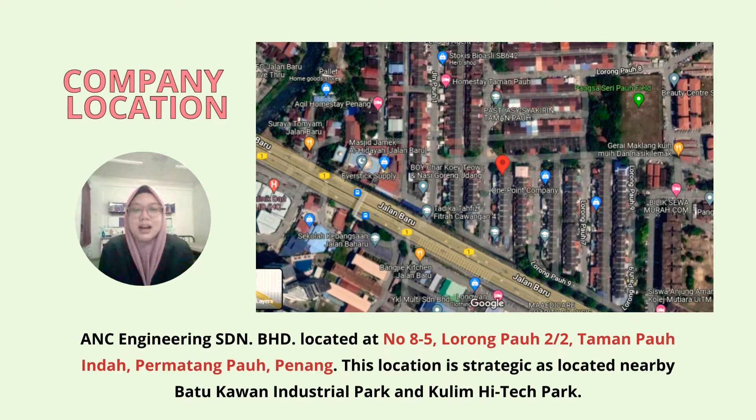The project will be located at lot 9001 till 9016, Mukim 12, Daerah Barat Daya di Persiaran Kelicap, Pulau Pinang. And the existing nearby facilities would be an international school, mosque or church, international airport, health facilities, and also an army base camp. The picture below shows the location of the project.

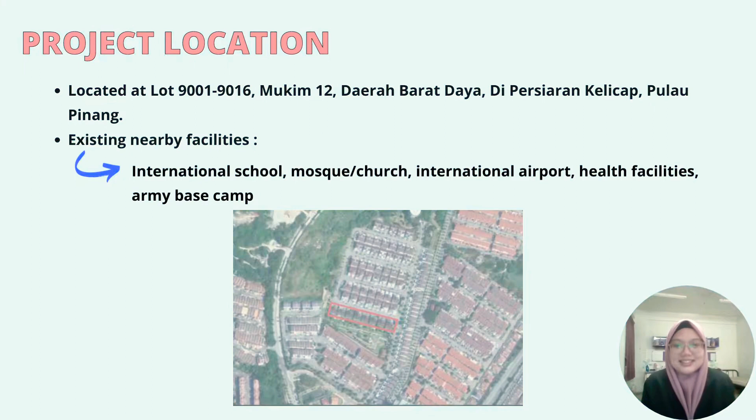So for the project detail, the district will be Barat Daya Pulau Pinang. The local authority will be Majlis Bandaraya Pulau Pinang, MBPP. The site location would be Persiaran Kelicap, Barat Daya Pulau Pinang, and the coordinates will be 5 degrees, 18 minutes 20 seconds north and 100 degrees, 15 minutes 34 seconds east. And the area will be 606,300 square meters.

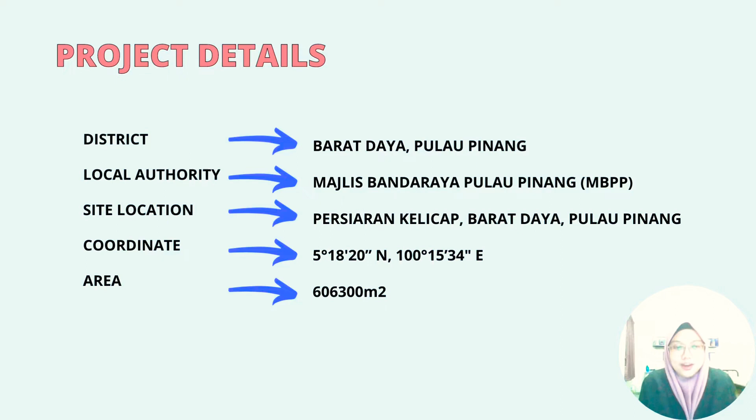Next, I'll be explaining to you the project authorities, the agencies and organizations and their responsibilities. So the Public Works Department, also known as PWD, their responsibility will be to monitor the project operation and the requirements that the developers and the contractor must meet with regard to environmental compliance. The Urban Development Authority would be observing the terms outlined in the letter of authorization. Next is the Road Development Authority. Their responsibility is to observe the terms outlined in the letters of authorization.

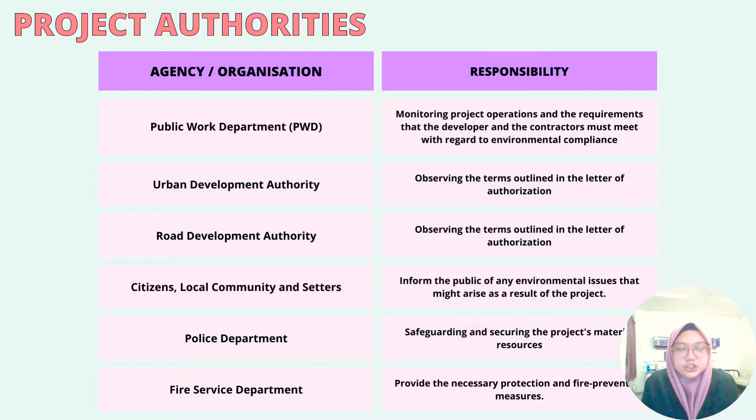Next, the citizens, local community and setters are to inform the public of any environmental issues that might arise as a result of the project. Next is the police department. Their responsibility is to safeguard and secure the project's material resources. And lastly is the fire service department. Their responsibility is to provide the necessary protection and fire prevention measures.

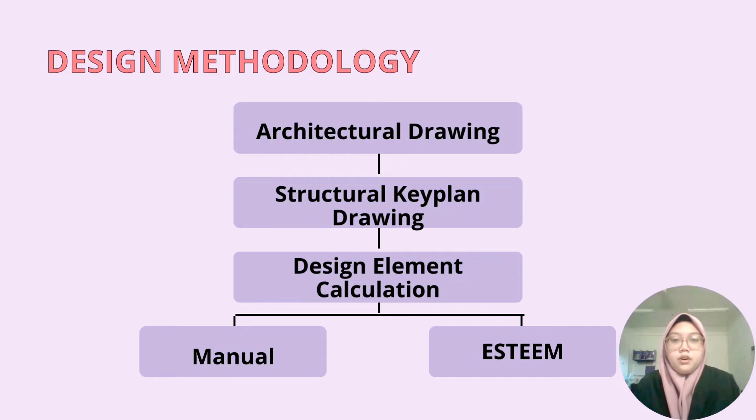My name is Arliana Natasha. I would be the structural engineer for this project. So I am going to explain to you the structural design. For the design methodology, first you need to have the architectural drawing. Next, from the architectural drawing, you need to provide a structural key plan drawing, and then you need to do a design element calculation from manual and Esteem, and both of the calculations are then compared.

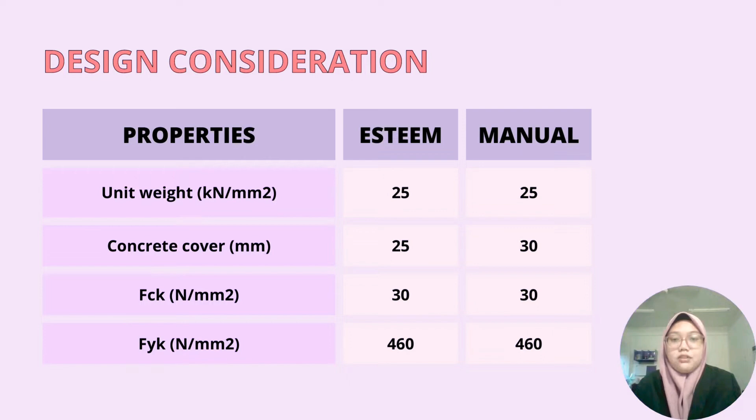The table shows the design considerations for both Esteem and manual. So the unit weight for Esteem would be 25, same goes with the manual, and the concrete cover for Esteem and manual is different. Esteem would be 25 and manual would be 30. The fck for both Esteem and manual is the same, which is the value 30, and the fyk value is 460 for both Esteem and manual.

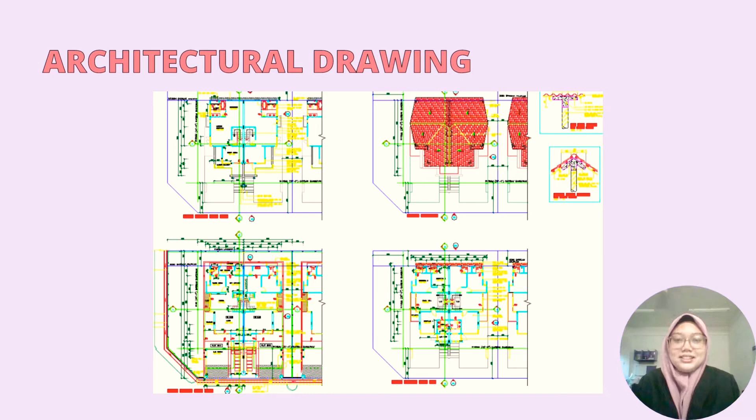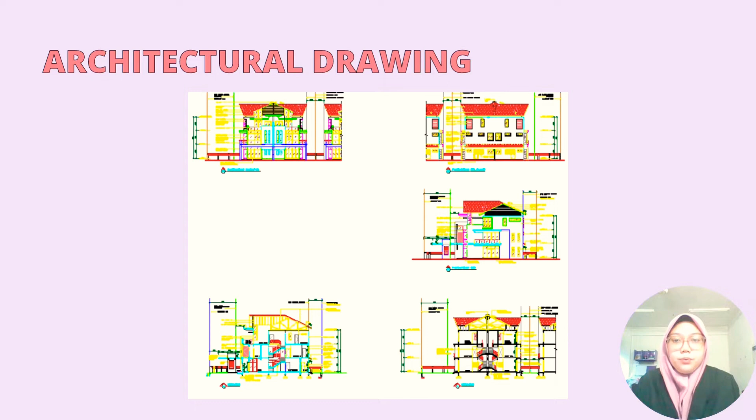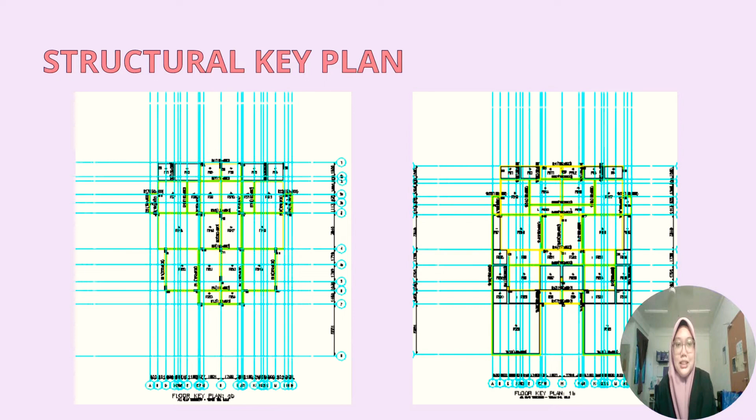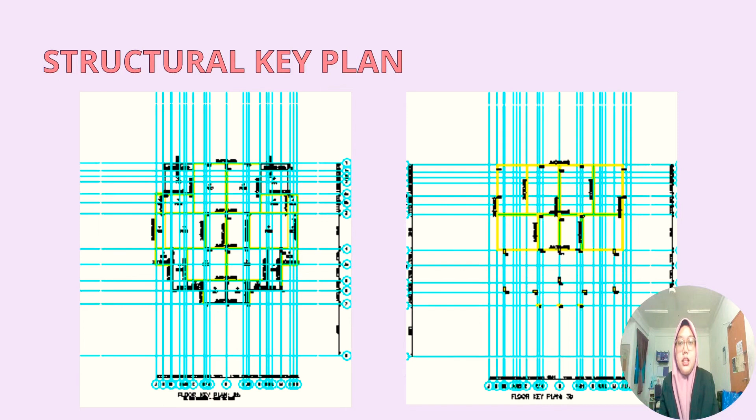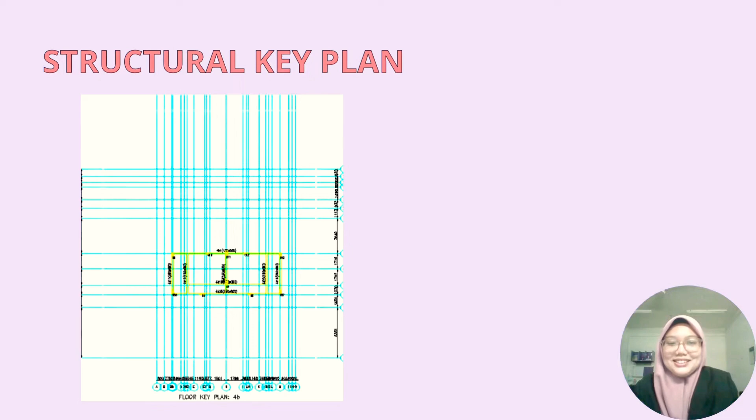The load transfer flow is first from the ground slab to the beam, then the load to the column, then lastly to the foundation. This is also from the highest floor till the ground floor.

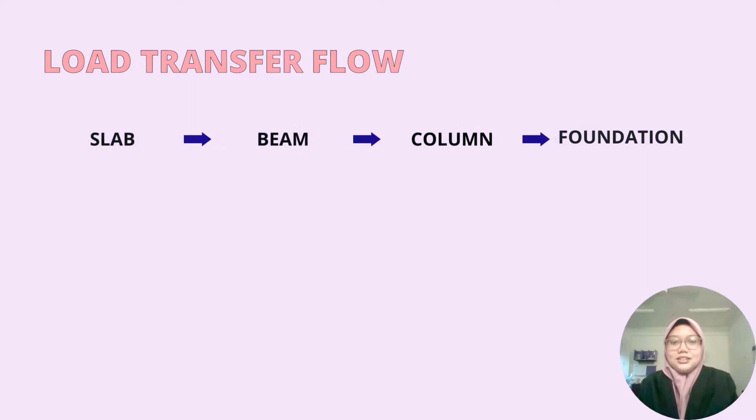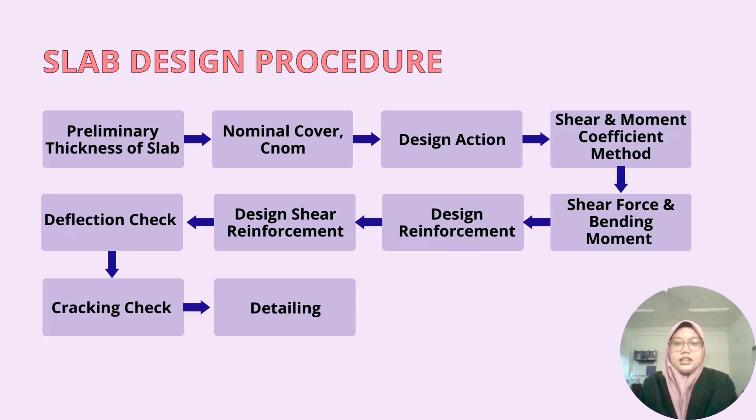So for the slab design procedure, it is shown on this flow chart. So first you need to have the preliminary thickness of slab. Second, the nominal cover, C nom. Then you need to find the design action. Fourth is shear and moment coefficient method. Fifth is shear force and bending moment. Sixth, you have to design the reinforcement. Seven, design shear reinforcement. Eight, deflection check, and then cracking check, and lastly the detail.

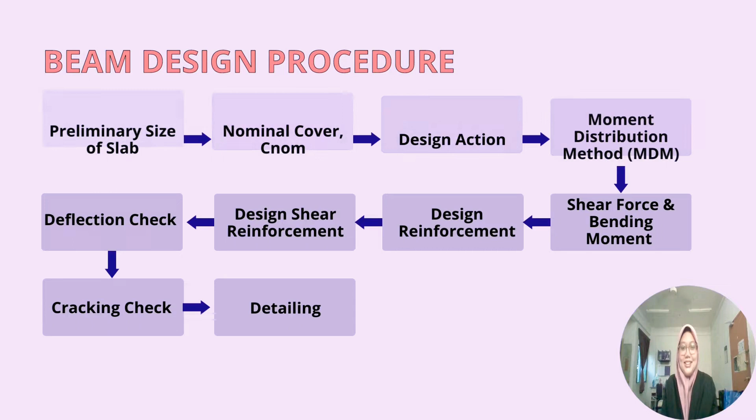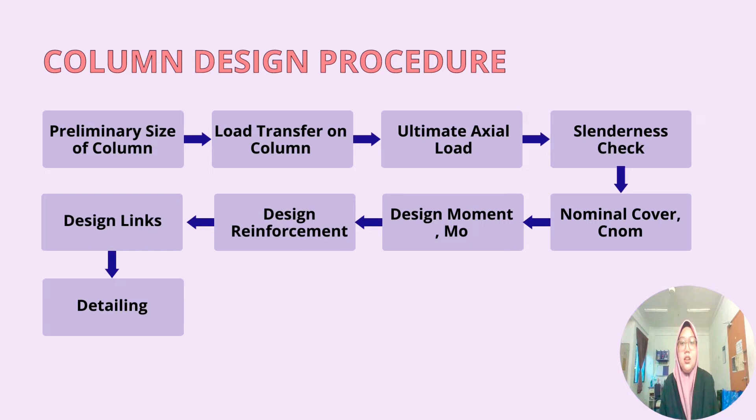So for designing the column, first you need to find the preliminary size of column. Second, the load transfer on column. Later you need to do the ultimate axial load and slenderness check, and then the nominal cover, then the design moment, design reinforcement, then you need to do the design link, and lastly the detailing.

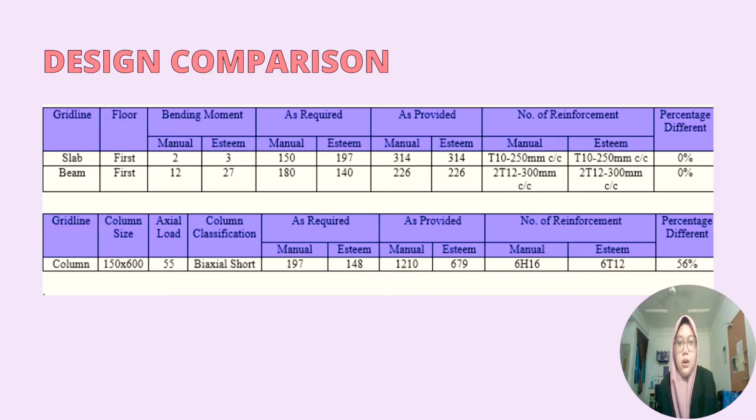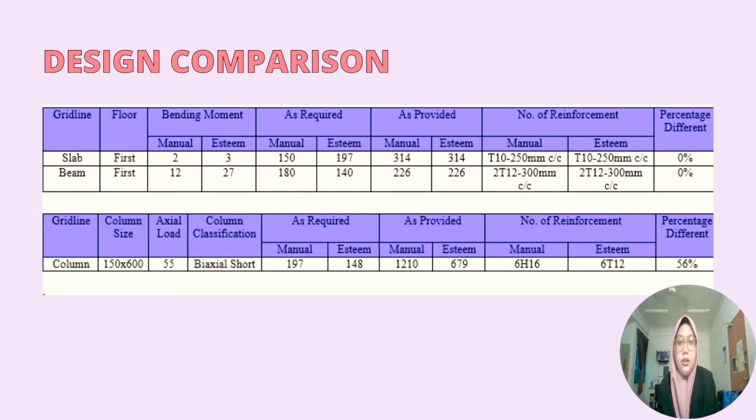So the design comparison for both Esteem and manual calculation is shown on the table. For the slab and beam, there is no percentage difference, whereas for column, there is a percentage difference of more than 50. This might be because of the increasing amount of calculation needed when calculating using manual calculation, and there might be some error while calculating.

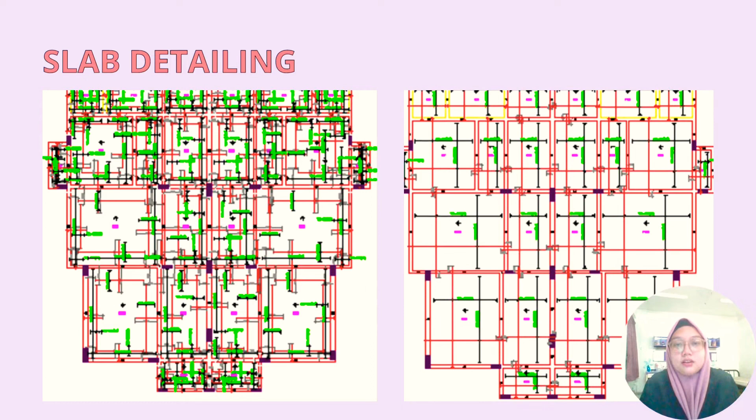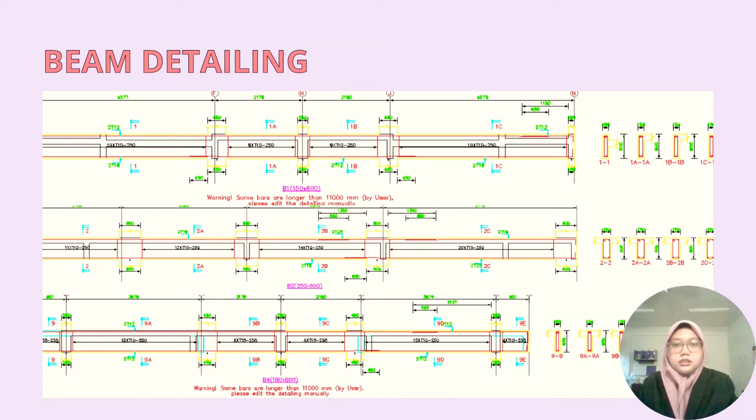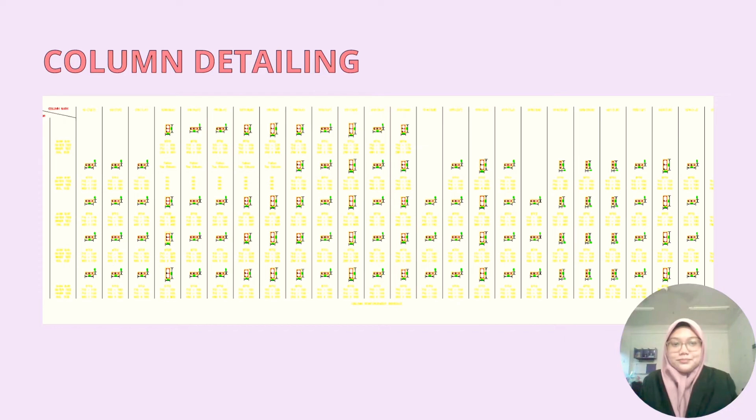So I am Siti Aisyah binti Ahmad Subari and I will present the infrastructure work in earthwork design. So earthwork basically involves moving, forming, cutting or filling earth on the project site. And it must be completed at the preliminary stage of the construction phase. Earthwork is critical because if it is completed on time, the construction will not be delayed and can be continued with other activities.

So the objective here is to improve the soil condition on site so that it can sustain the structures that will be built, and then to estimate and determine the precise earthwork needed for the project's practicality. And lastly, to aid in land use planning and compliance with applicable guidelines and rules.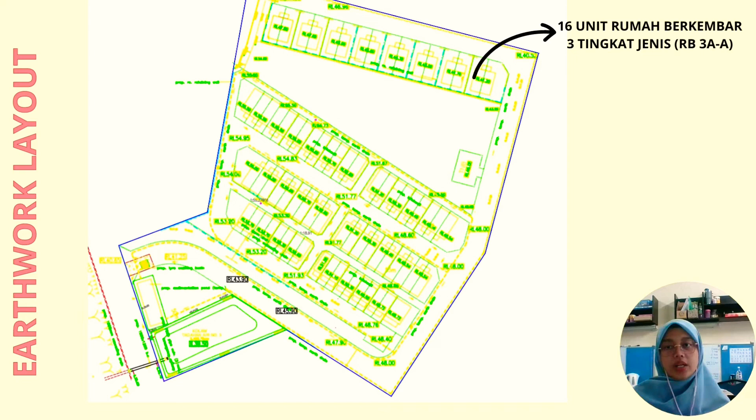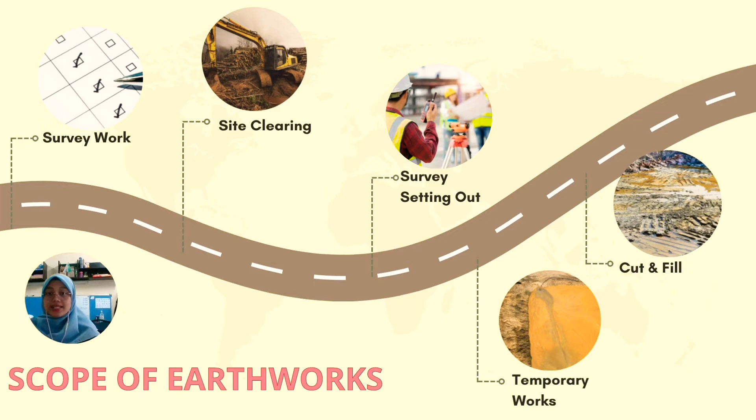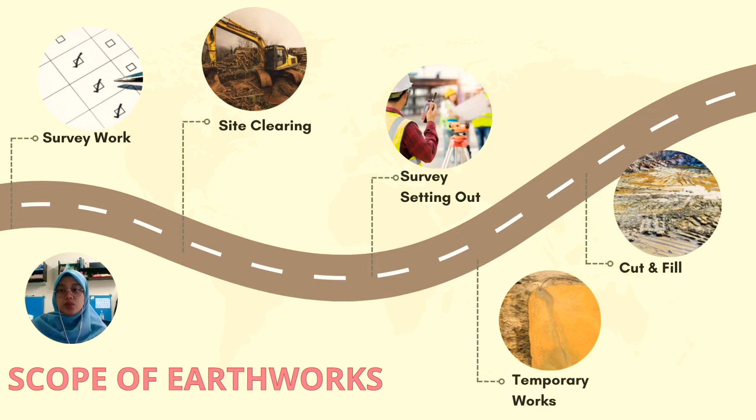So here is the scope of the earthwork. As for the survey work, we have to do the horizontal and vertical survey to determine the existing ground level. Next, the site clearing. It is a process of removing all elements of the land area that obstruct the process of construction. And then the survey setting out. The site demarcation and benchmark need to be approved by the qualified land surveyor. Then the temporary works: some infrastructure will be constructed as part of earthwork, just like I mentioned just now. And lastly, we have cut and fill.

I will explain in detail the cut and fill work here. So this is the common method used for any construction project, and cut and fill is the process of mass addition and mass removal of soil. There are a few methods in determining the cut and fill area on site, and this project used the grid method. The accuracy of the calculation depends on the grid cell size, and this project used a size of 25 times 25 meter square for the grid system.

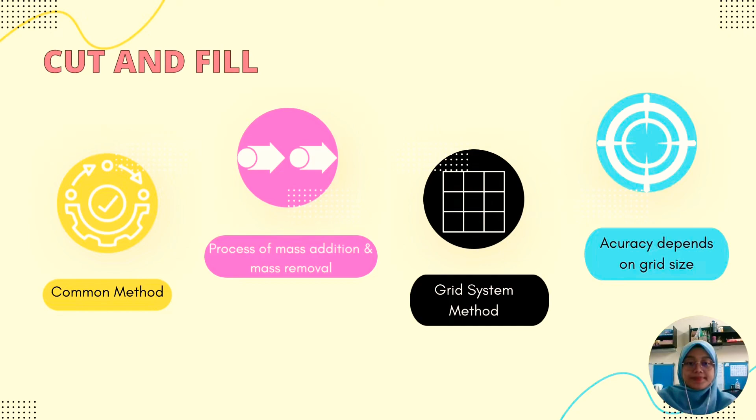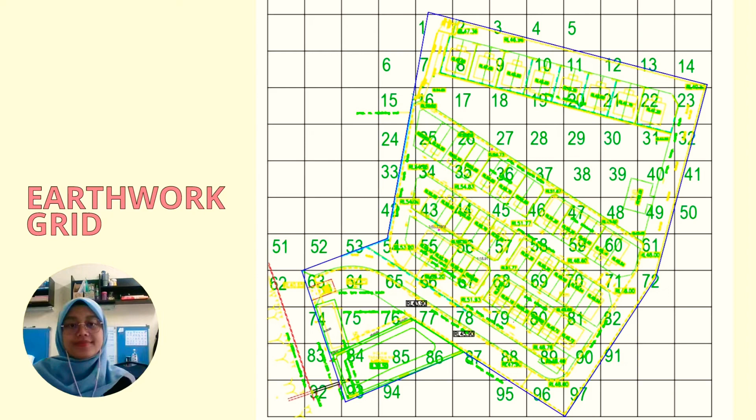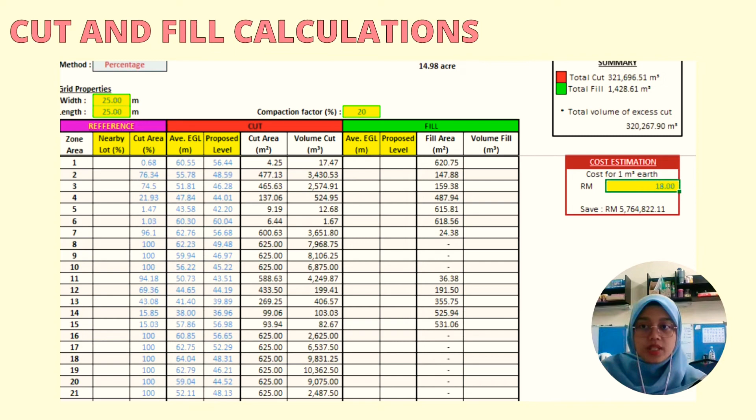So here is the earthwork grid method that we implemented on our project site. This consists of 97 grid boxes. So here is our cut and fill calculation, which we included in a software. After we propose a new level on site, we just include all the numbers inside this software to obtain the area that needs to be cut or filled. And then the summary of cut and fill is as shown here. The total volume of excess cut on our project site is 320,267.90 meter cube.

So the primary purpose of the sediment basin is to prevent sediment from entering streams, rivers, lakes, wetlands, or existing drainage. By doing this, it will collect and detain the runoff, allowing the suspended solids to settle down prior to the runoff leaving a site. And then the size of the sediment basin is determined by its location, drainage area size, soil properties, land cover, rainfall intensity, site condition, and a few others.

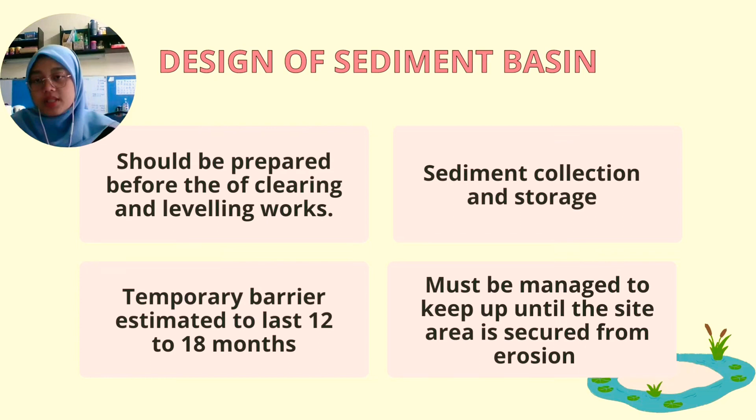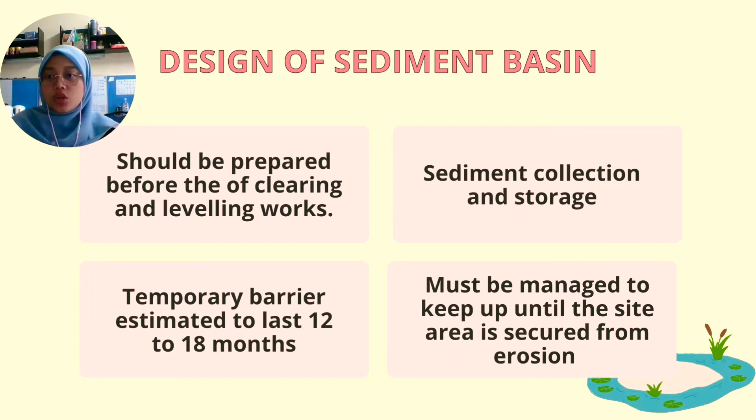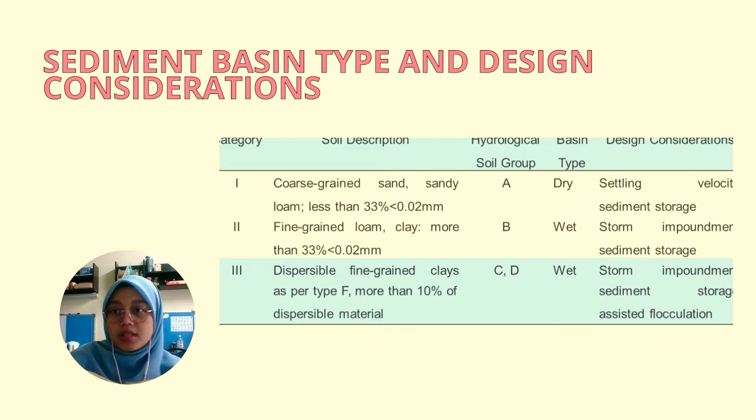So it is a temporary barrier estimated to last 12 to 18 months and must be maintained until the site area is secured from erosion. So we need to know the category of the soil condition, and based on the MSMA specification for our site, it is sandy loam type which has the hydrological soil group A. So the basin type here is dry, and the design consideration is settling velocity and sediment storage.

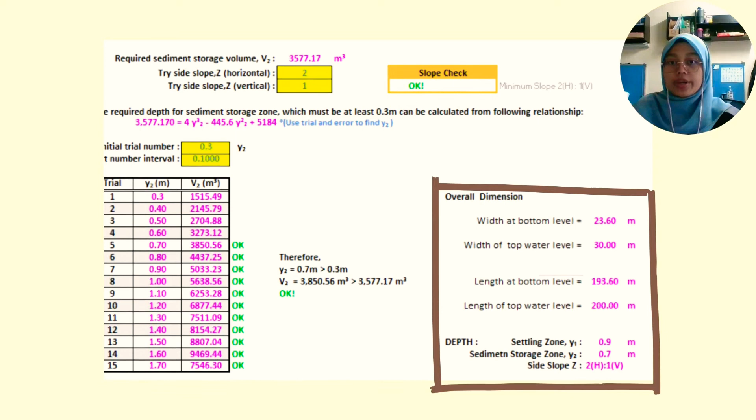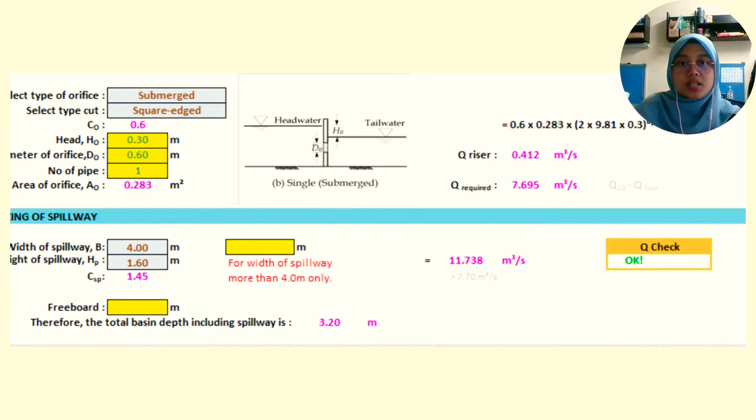From the values above, this is the overall dimension generated from the software. As you can see, here is the sizing of the basin outlet and the sizing of the spillway. So the type of orifice is submerged and square edge. So here is the sediment basin dimension. It is as generated from the software. The length is 204 meter and the width is 30.4 meter, with settling zone depth 0.9 meter, and the slope with the ratio 2 to 1.

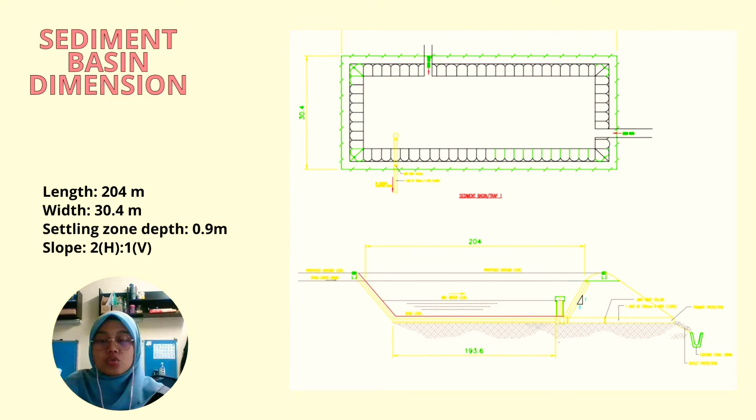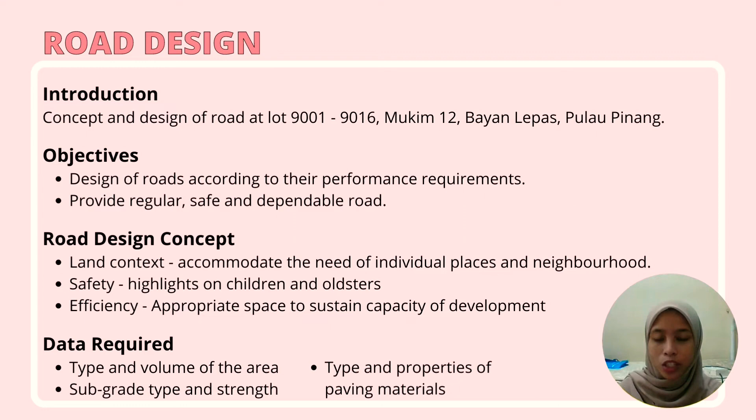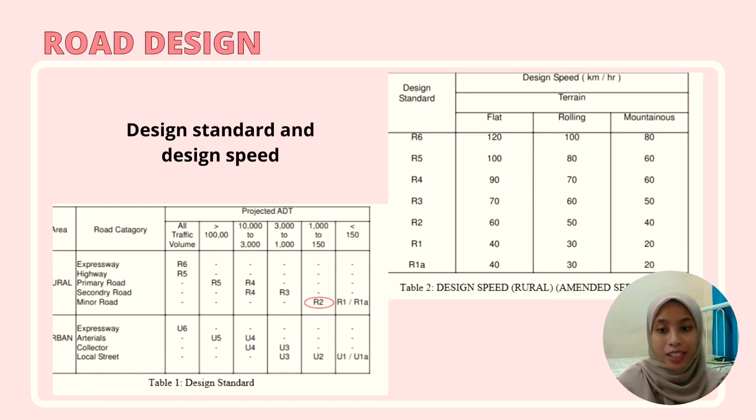So the data required for this road design is, first, type and volume of the area, then subgrade type and strength, and lastly type and properties of paving materials used. So this is the design standard and design speed that I refer to to design our road for this project. As we can see from the table below, the category for the road is R2 because the initial daily traffic volume is 1000 and the road category is minor road for rural area. So based on the category R2, we can identify the design speed based on the next table, which is the design speed table for rural areas. The terrain of our project is mountainous, which means the design speed for this road is 40 km per hour.

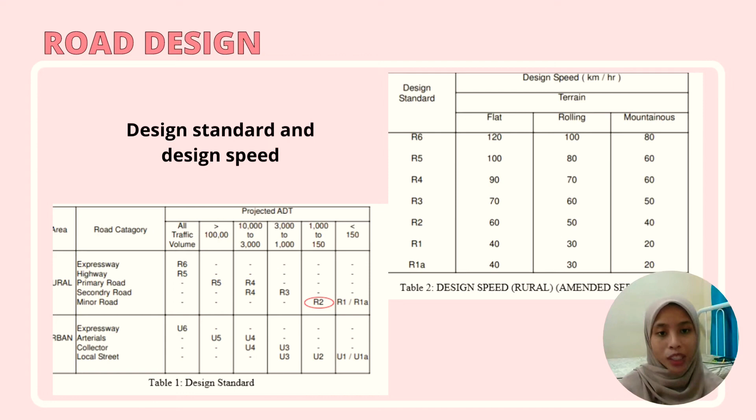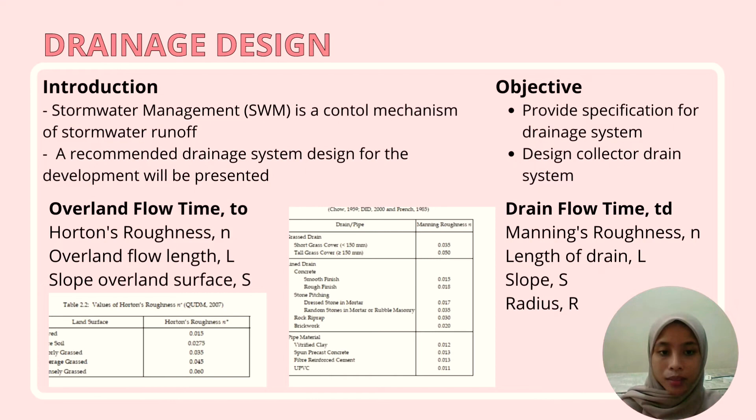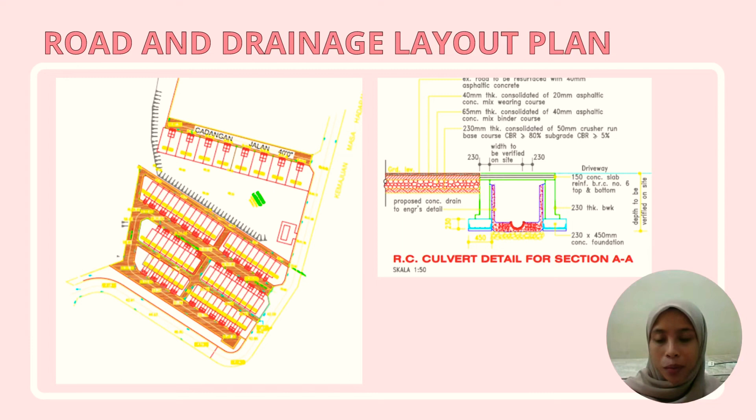Okay, this is the road and drainage layout plan for this project. The left side shows the layout of road and drainage, where the brown color represents the road and the blue one is the drainage system. Then, the right figure shows the detail of the drainage for section AA. The drainage was designed with a round bottom.

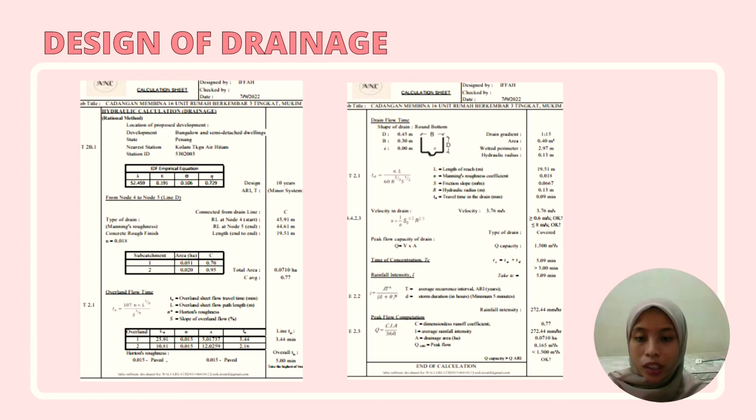Okay, the next slide will show the overall drainage design value. The overall value from line A to line I for the drainage design of this project are shown as figure attached in this slide.

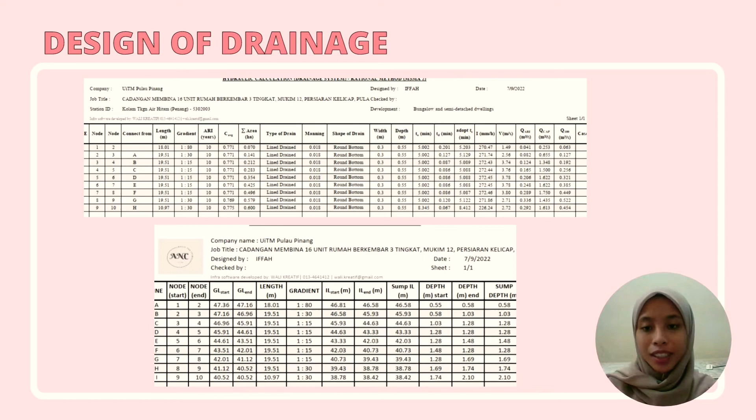Next is detention pond. Detention pond is the most significant component for stormwater quantity control. There are two objectives of the detention pond design, which is to provide specification sizing for detention pond and to release runoff at certain rate to prevent flood from occurring. The area of development is 60.63 hectare, which is quite large, and the size proposed must be suitable for the area. The volume for each ARI for post-development are shown in the table above.

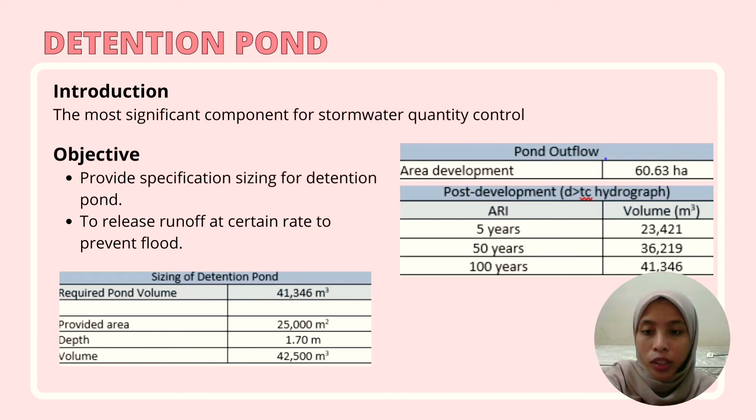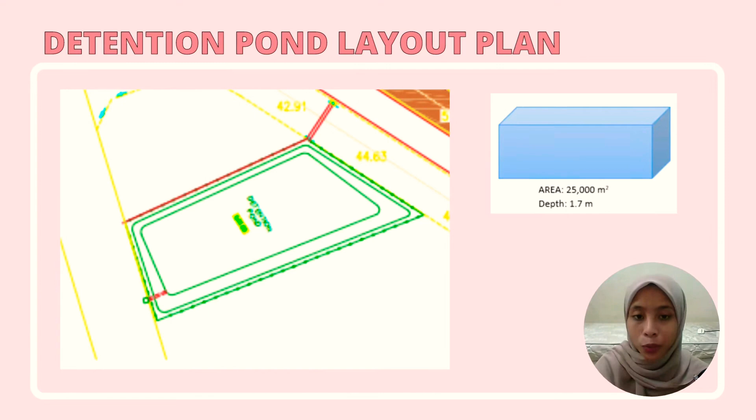Based on the required pond volume, the size is provided as the left table. This is the layout plan for the detention pond of our project with its dimension.

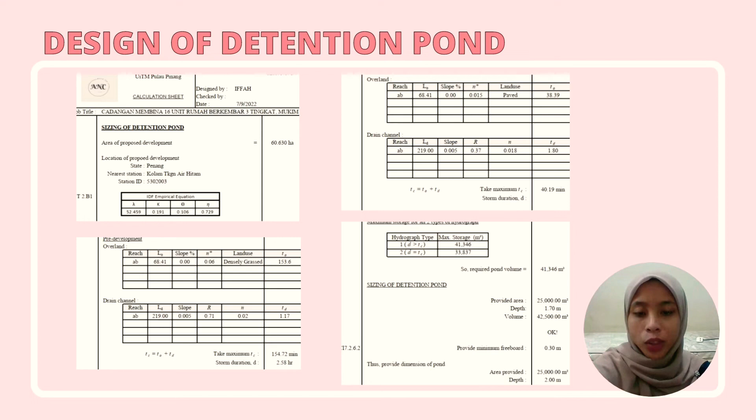This slide shows the calculation sheet for the proposed detention pond. Based on the nearest station, which is Kolam Takungan Air Hitam, the IDF empirical equation can be determined. The overland and drainage channel flow time for pre-development and post-development can be seen in the calculation sheet. The volume of detention pond provided is more than the required pond, so the size provided passes for this project.

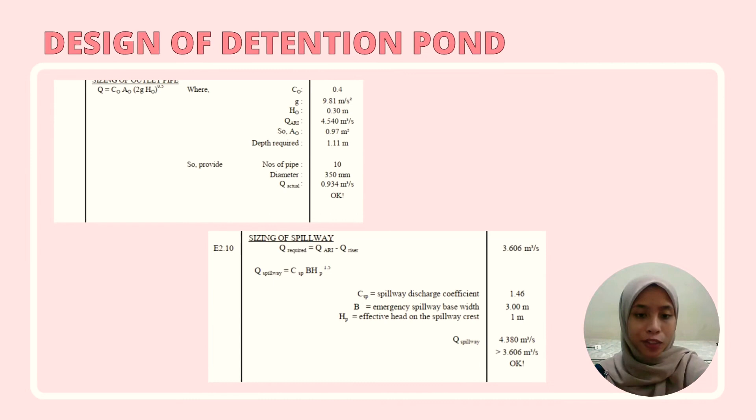Next, the sizing of outlet pipe and the spillway also pass for this project. That's all for road and drainage design.

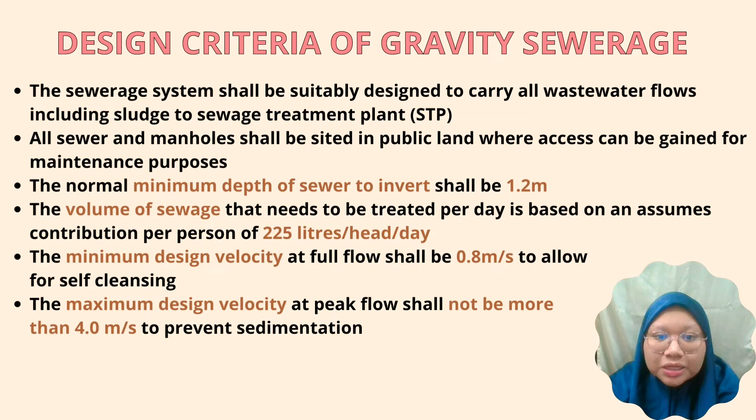Next, the minimum depth of soil cover over the sewer should be 1.2 meter. The minimum size of gravity sewer should be 225 mm in diameter. The minimum size of domestic connections to the public sewer should be 150 mm in diameter. Manhole location should be at the starting end of all gravity sewer, every change in direction or alignment for sewer less than 600 mm in diameter, every change in gradient, every junction of two or more sewer, and every change in size of a sewer. Sewer works should be tested and inspected for water tightness to prevent infiltration and ensure pipes are laid correctly.

Design parameter of this gravity sewerage. For all manholes, the depth should be 1.2 meter, while the velocity is minimum of 0.8 meter per second and maximum of 4 meter per second. The bed drop of manhole should be 900 mm for pipe less than 225 mm. The calculated population equivalent is 365 as we consider 5 PE per house. By this, the land area required by calculated PE is 600 meters square.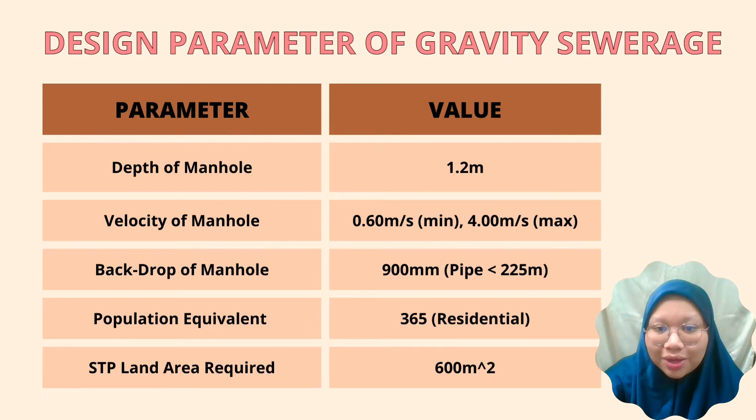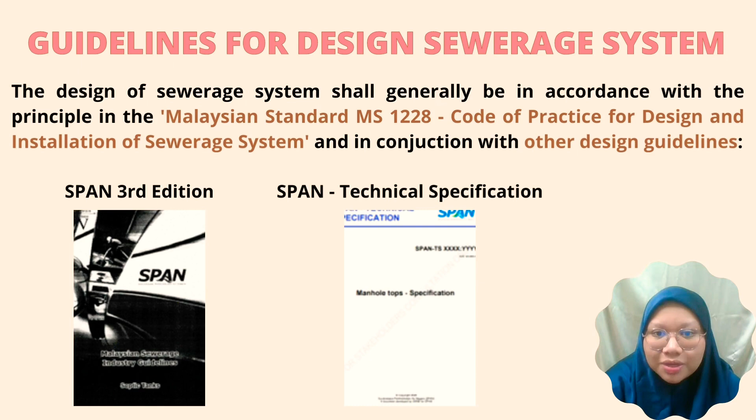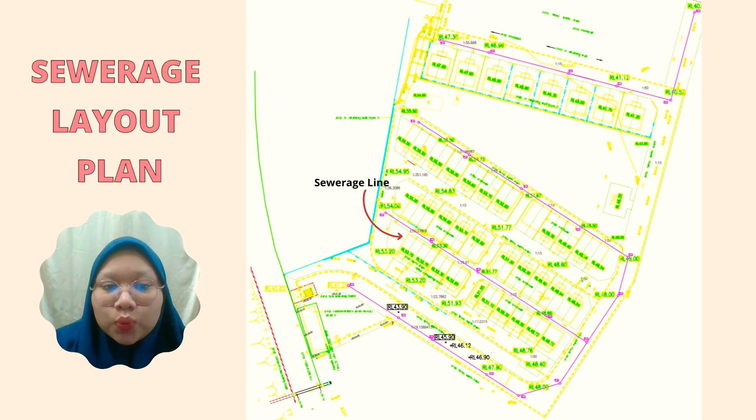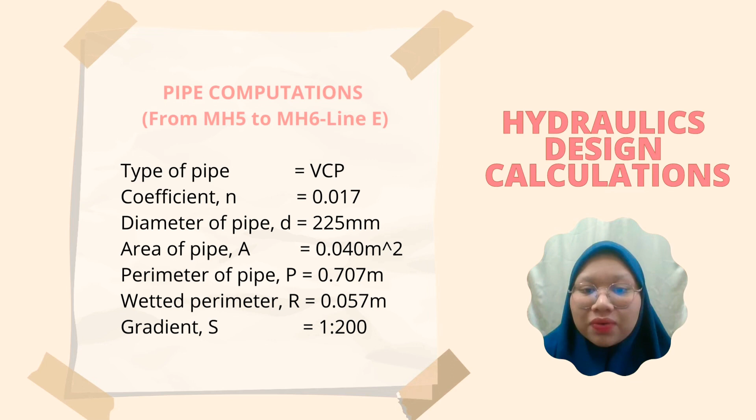This is the hydraulic design calculation example for manhole number 5 to manhole number 6 for sewerage line E. The design computations and type of pipe used in this project are VCP. The coefficient is 0.017, diameter of pipe 225 mm, area of pipe 0.04 meter square, perimeter of pipe 0.707 meter, wetted perimeter calculated is 0.057 meter, and the gradient is 1 to 200.

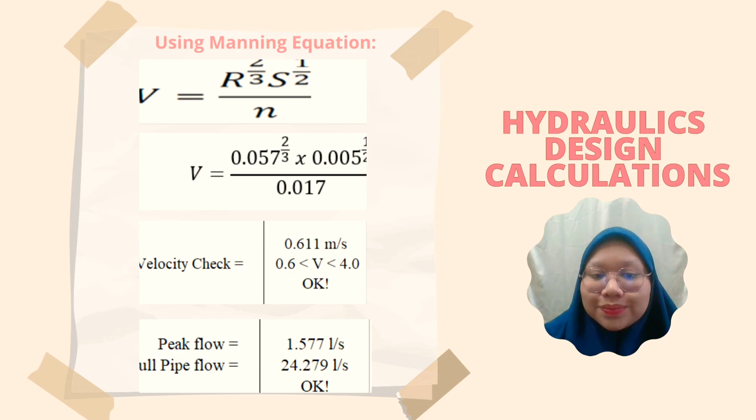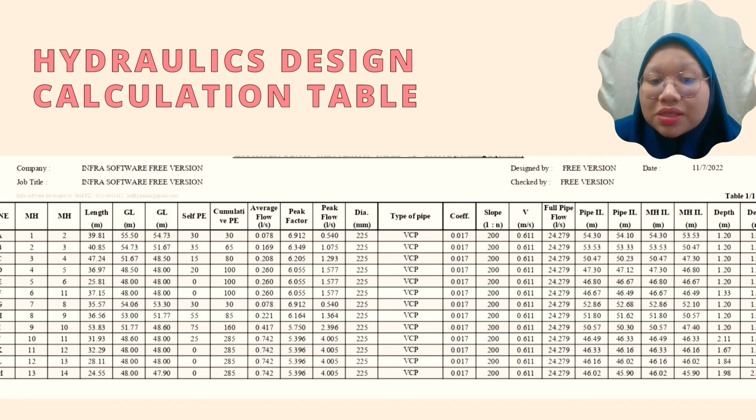This table shows the summary of hydraulic design calculation for sewerage lines in this project. As we can see, all the sewerage lines' calculated velocities are within the range of minimum 0.6 meter per second and maximum velocity of 4 meter per second. In addition, the peak flow is lower than the full pipe flow. Therefore, we can say all the sewerage lines in this project are acceptable.

Assalamualaikum. For the next part, I, Tuan Muhammad Farizal, will present to you the water supply design for this project.

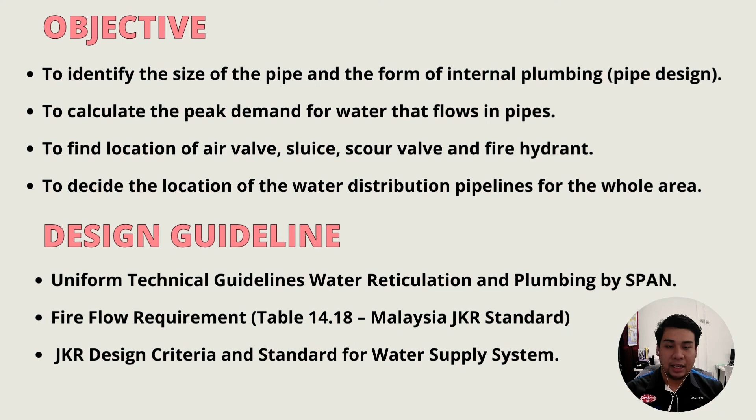The design guideline used for this water supply design is the Uniform Technical Guidelines for Water Reticulation and Plumbing by SPAN, the Fire Flow Requirement Table 14.18 by Malaysian JKR Standard, and the JKR Design Criteria and Standard for Water Supply System.

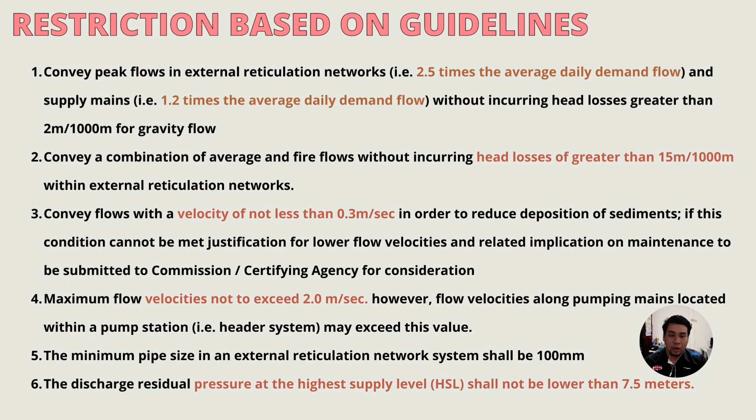The next one is the pipeline must convey flow with a velocity of not less than 0.3 meter per second in order to reduce the deposition of sediment. The next restriction is the pipeline must have a maximum flow velocity not exceeding 2.0 meter per second. And the minimum pipe size in an external reticulation network system shall be 100 mm. The discharge residual pressure at the highest supply level, HSL, shall not be lower than 7.5 meter.

There were also a few requirements set by the local authorities. The first one is JKR, which gives requirements for the specification of applicable codes and standards for joints, pillar hydrant, and other piping use. JBA Pulau Pinang requires submission of a report requesting the pressure head available at the proposed tapping off point and existing water pipe.

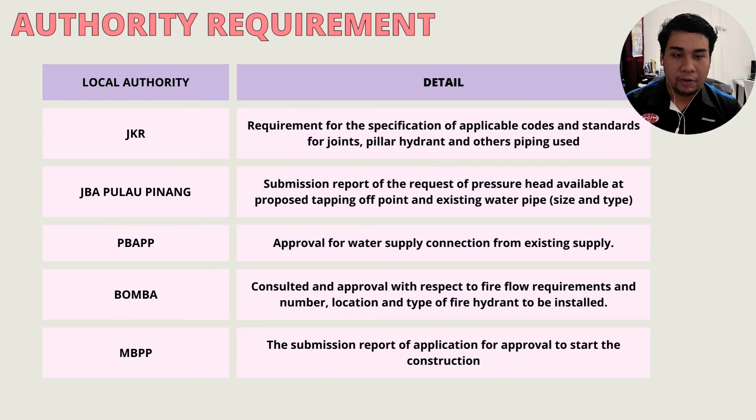For PBAPP, we must have approval for water supply connection from the existing water supply. For Bomba, we have to consult and get approval with respect to fire flow requirement and the number, location, and type of fire hydrant to be installed. Lastly, for MBPP, we have to do a submission report of application for approval to start construction.

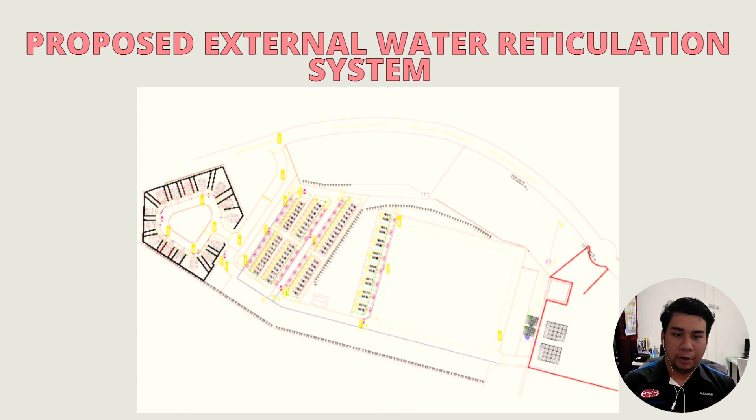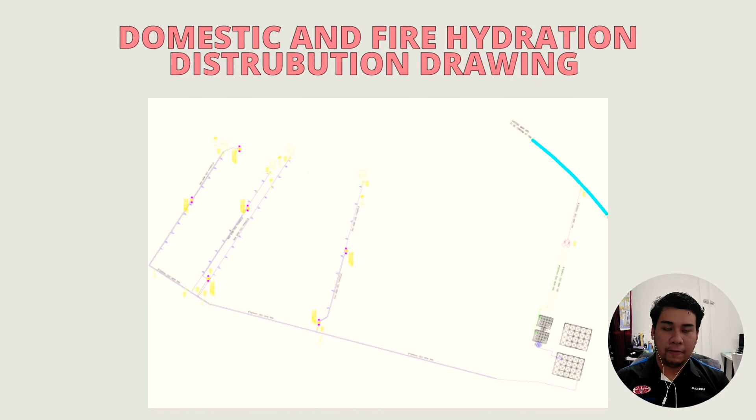As you can see now, this is the diagram of the proposed external water reticulation system for our project. And this is the distribution drawing for the domestic supply and also for the fire hydrant outlet.

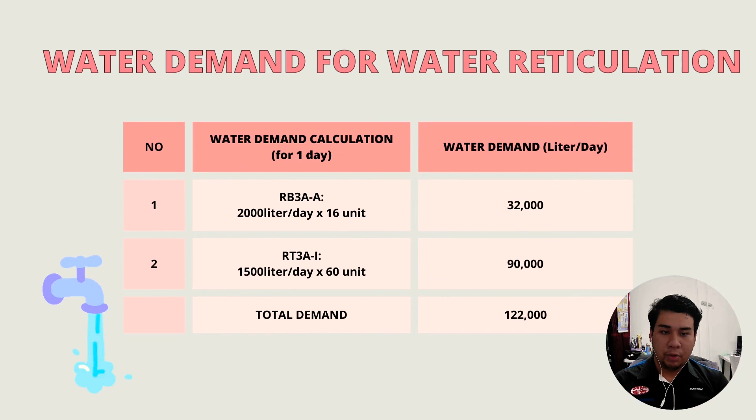Based on the calculation, the total demand for the domestic pipeline of our project is 122,000 litres per day. For fire flow, the total water demand for two hydrants is 136,800 litres per hour.

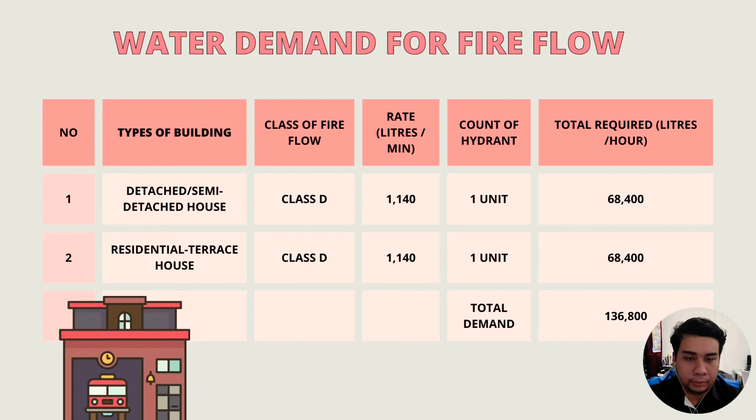For the calculation of residual head for our pipeline system, the pipeline system will be divided into three models: model 1, from the tapping point to the suction tank; model 2, from the elevated water tank of domestic water supply to the individual unit; and model 3, from the elevated water tank for fire flow to the highest elevation of the hydrant. At the end of the calculation, we will get the residual head above supply level, which must be greater than 7.5, and we will design our pipeline system accordingly.